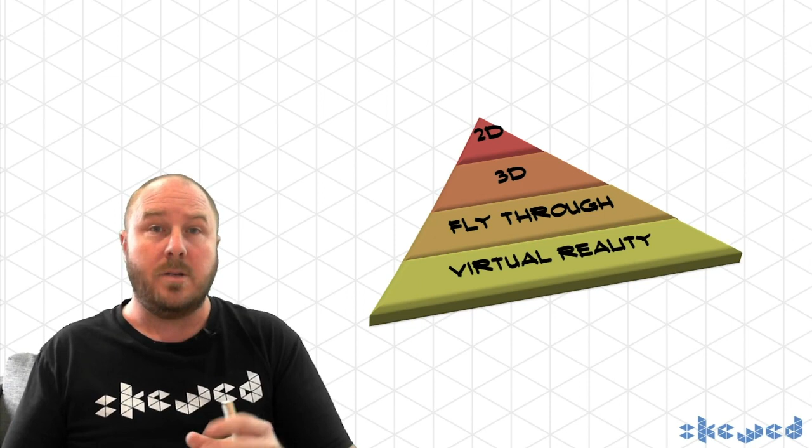Now, the future, I guess, will be augmented reality, and Enscape doesn't cover off on that. Not many apps do, and there's not really much connectivity to Archicad right now that can achieve this, but that will be the next step moving into the future in terms of people being able to understand and recognize space as they can see it relevant to existing conditions.

Now, picking your tool - there are a number of real-time rendering engines available on the market right now. And the reality is that it's kind of like picking a Phillips head screwdriver versus a blade screwdriver. They're kind of the same and not the same - they basically do the same thing, but they're just slightly different in the way they approach things. So that's one thing people need to consider when they look at this as a tool and when they compare it to others.

But from my perspective, this is kind of my assessment on it before we go into the live demonstration. First of all is licensing. Enscape in Australian dollars is around $600 to $650 per individual license per year. That's for a fixed license on a computer, but you can also get a roaming network license for around 1,000 Australian dollars. From my perspective, that's actually really cheap for what it achieves compared to the prices we pay for our other tools to deliver our projects.

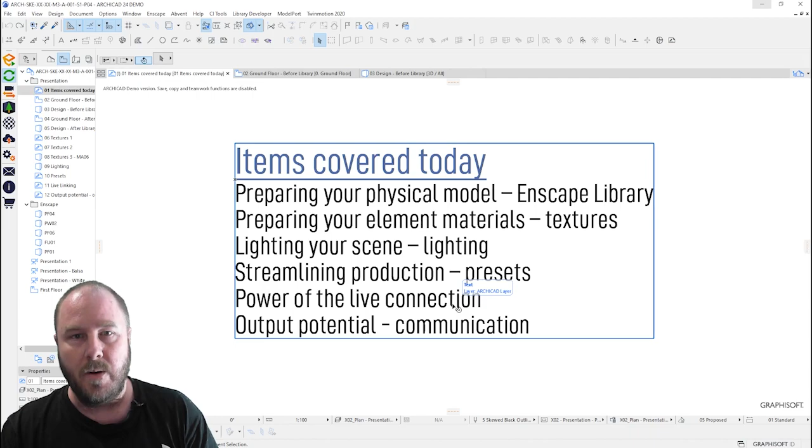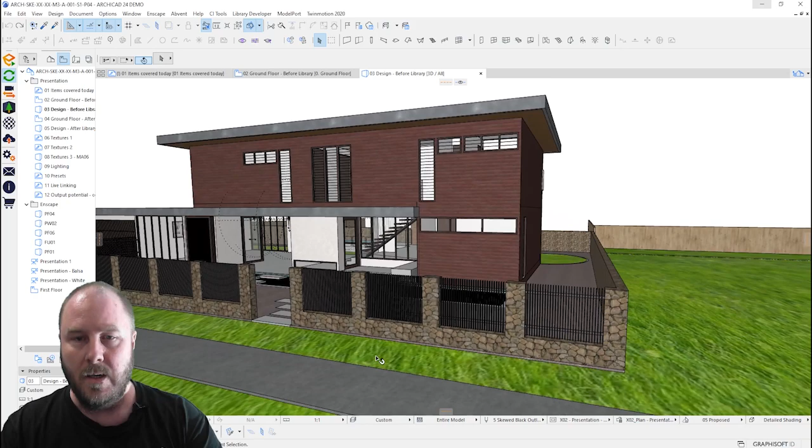First we go into our ground floor plan. You can see we've just got an architectural house, and not very much going on, just a simple house. Then we see it in its 3D state and can fly around and look - it's a reasonable architectural style house, but it's missing a lot in terms of trying to tell the picture, to sell the dream and vision to your clients. So it's really important that we start activating that by putting stuff in from the Enscape library.

The Enscape library can be accessed via the Enscape toolbar, which you can load up within your Archicad work environment. We have a series of buttons on this side. In Enscape 3.0, there are different toolbars within Archicad and within Enscape, each with their own purposes. The one we're going to use right now is the asset library, so let's open that up.

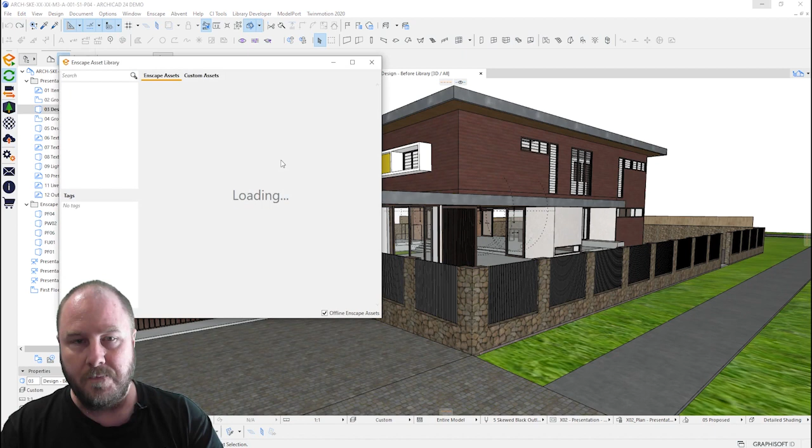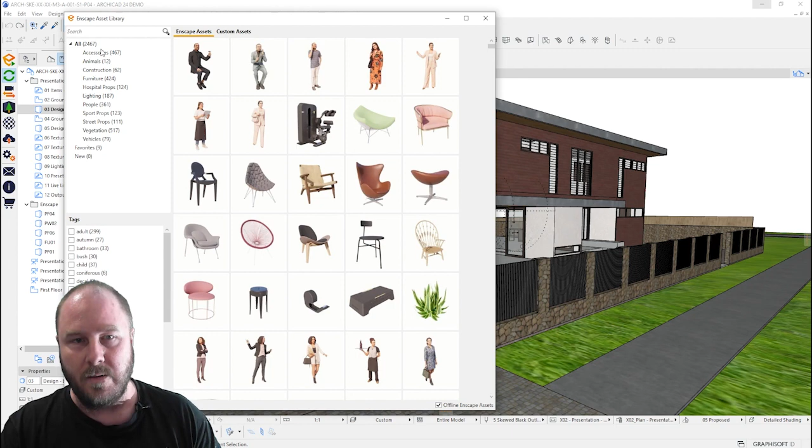The Enscape asset library is broken up into about 2,500 assets - you can see at the top there's just under 2,500. It's got subcategories, and items are tagged as well, trying to enable you to find things easily. In this instance, let's go for a person that's going to walk - you can see it's not what they're called, but they're tagged that way to find it.

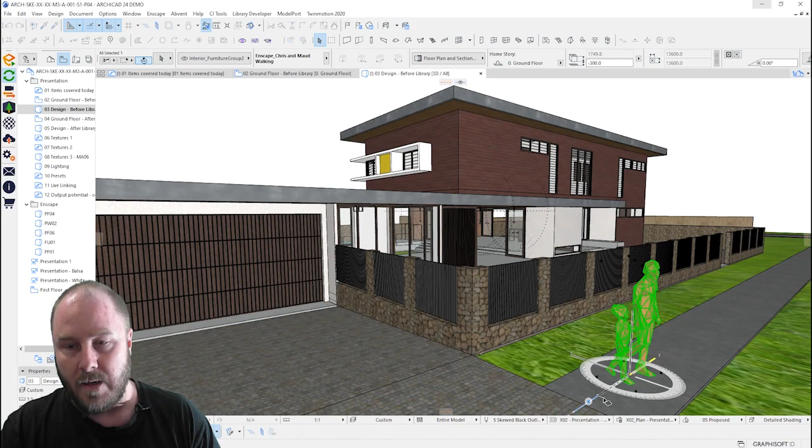Let's pick these two nice young people here, and we'll put them right here. So that is facing the wrong way - it just places it in a default position. Now we've placed those.

Because we've only got a short session, it would take quite a while to show you all the steps required to essentially dress up this model. But right now, you can see here, before the session, I went through and furnished and landscaped and provided some additional context in the street with Enscape.

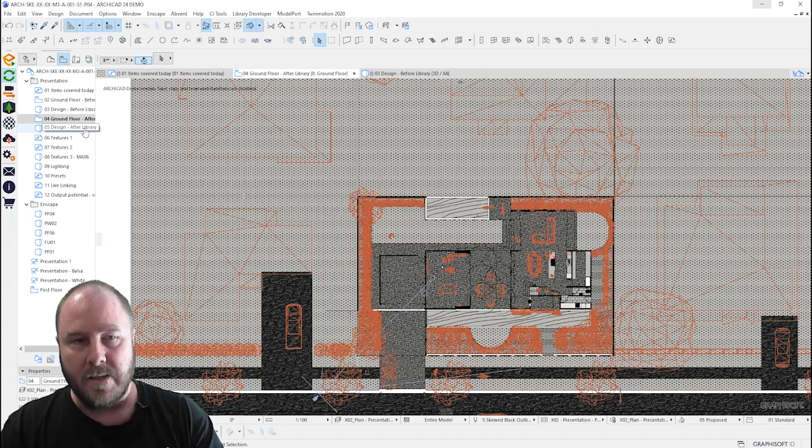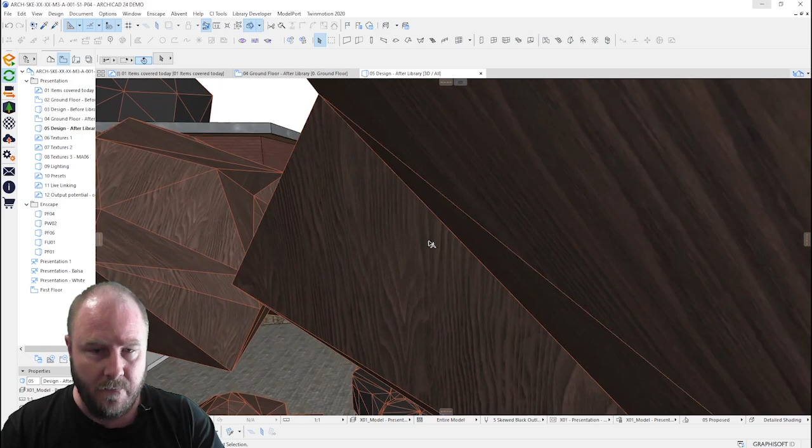So what you can see here, we have our neighbourhood all modelled in and included, with our neighbourhood trees. Enscape comes with cars, street furniture, houses even. This means you can put context in beside you in terms of all your neighbours, all of those exciting things.

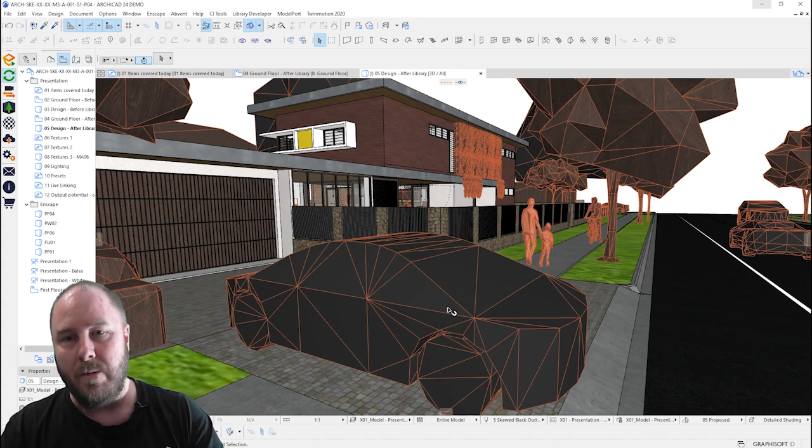Now, purposely, all of these items you can see here don't look very nice in Archicad - that's to reduce the number of polygons so it doesn't bog down your model. When you work with landscape items that are more photorealistic, you end up with a problem whereby Archicad bogs down due to the number of polygons. So essentially these are placeholders or proxies within Archicad that enable the rendering software to do its job in the back end.

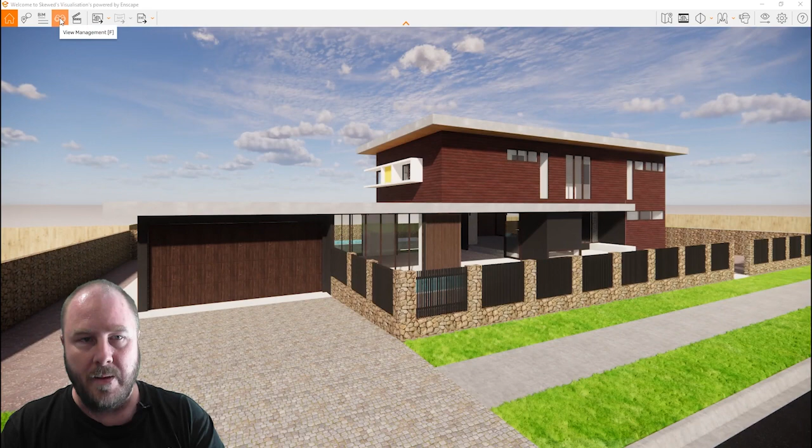So let's just jump into Enscape now and see what this actually looks like. This is the before - you can see already it looks pretty dull, not very exciting. Now what we're going to use is one of the tools within Enscape's work environment, the View Management. Let's click, and these are all the views - saved, or the Archicad saved views. Let's just click between those now.

This takes a little moment to remember exactly what's going on. It takes you to the point where you save the view within Archicad, plus all the layers you've turned on, so you can see the young man and his child walking along that we placed in before.

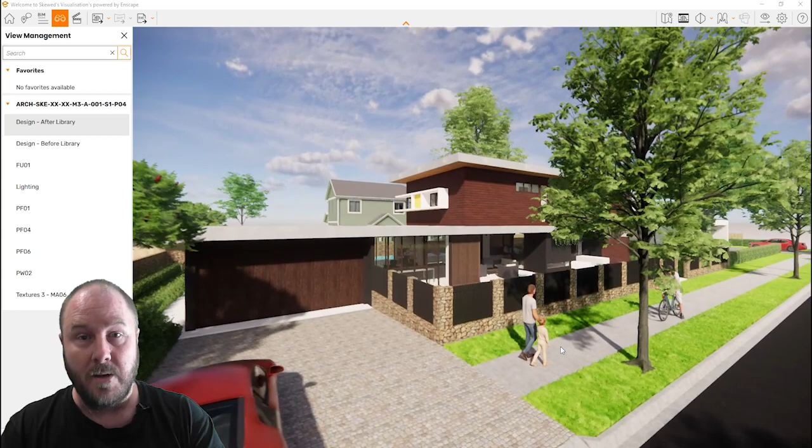We have our cyclists on the pathway - thankfully in Queensland cyclists are allowed on pathways. All the landscape elements: cars, trees, houses - we've got a whole neighbourhood surrounding us, which is really critical when trying to sell a vision to a client, giving them context of their surroundings.

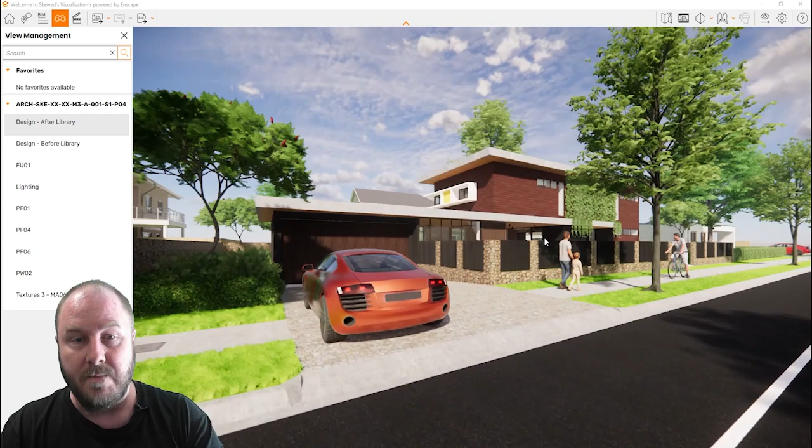Now this is obviously the case where you don't have any context that you haven't been able to model up yourself - you've just been able to put some stuff in.

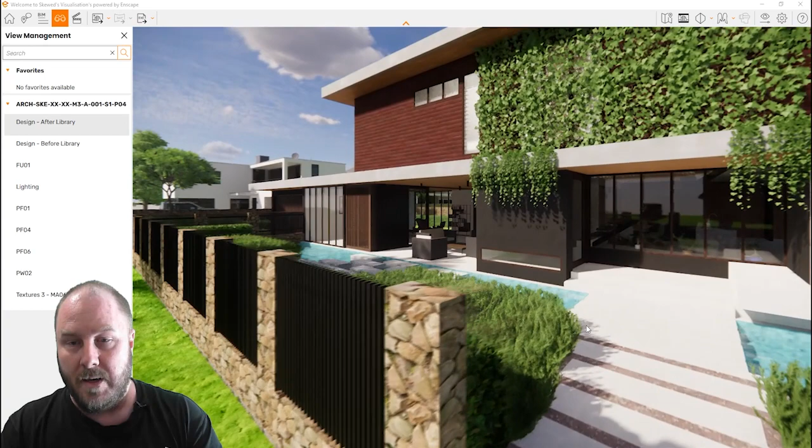Some of the exciting things here - we have 3D grass blowing in the breeze, and you'll understand how that works nicely later in the presentation when we show the outputs. We have exciting outcomes with water - it actually ripples - and going out into the pool area we have some nice landscape, with people diving in and playing sport. Lots of fun things here.

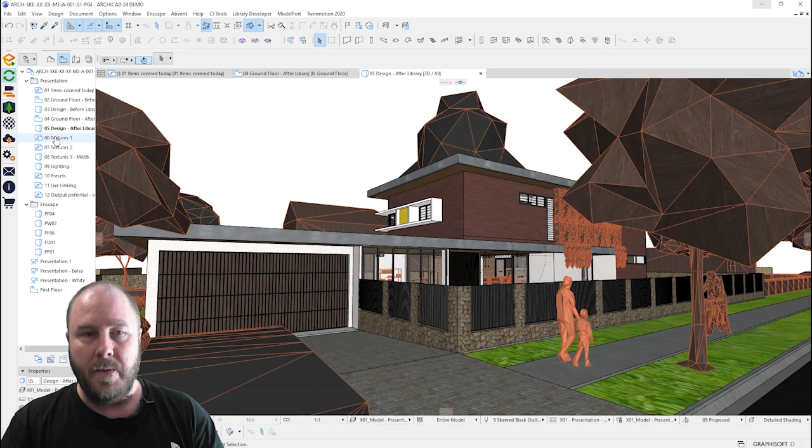Now, to take this to the next level, there's a couple more things I think are really important to talk through with you. Let's go back into Archicad and talk about textures - a really important thing in terms of moving your Archicad model forward.

This is one of many sites, and Enscape has a series of technical webinars on how to use Enscape with Archicad. I thoroughly encourage you to watch those, because Kai from Enscape goes into a lot more detail about how all of this works.

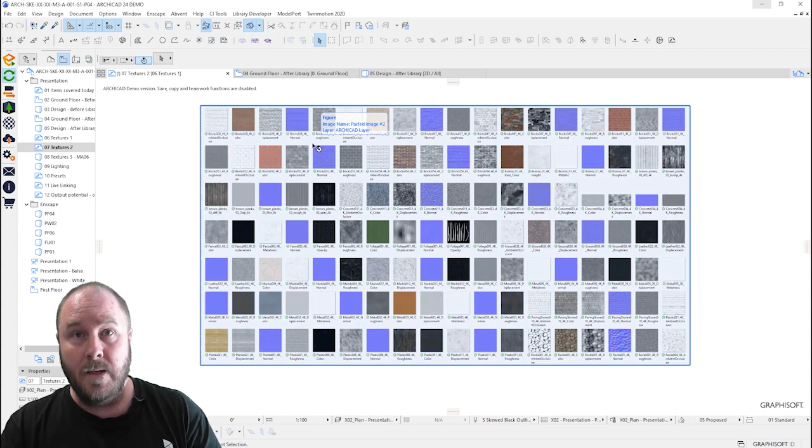We don't have enough time to go into all that detail today, but this is one of the texture websites. You can see I've downloaded these and loaded them into a library in Archicad - I have a folder saved with all these textures, which gets loaded as a library within Archicad so I can see it.

You can see here PBR materials don't just come as a single image, they come as a collection of images, and we'll see in a moment why that's really, really important.

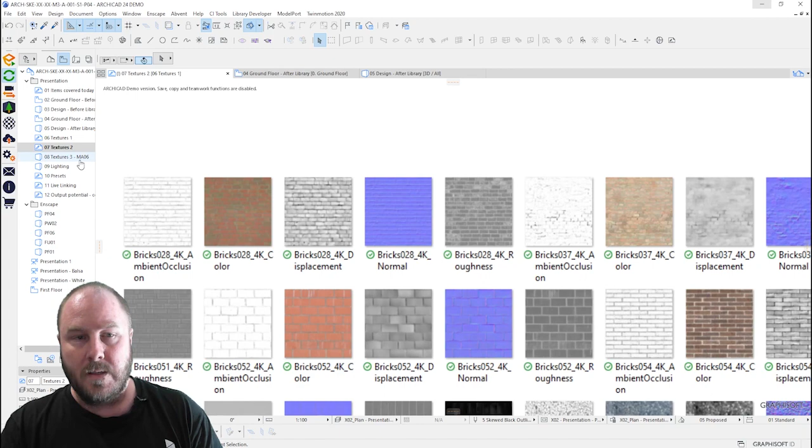One of the frustrating things when designing with out-of-the-box Archicad textures is this. So we're sitting here right now and we can see our wall - I've just applied a different texture to this wall.

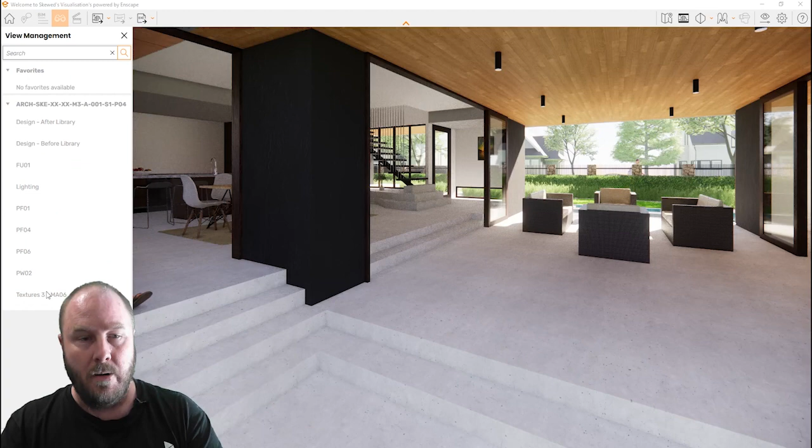Let's go over into Enscape and look at our wall - it should spin us around. Right now it's looking kind of flat, not that exciting. Enscape has the ability to use different layers or images, stacking them on top of one another to provide realism in the imagery.

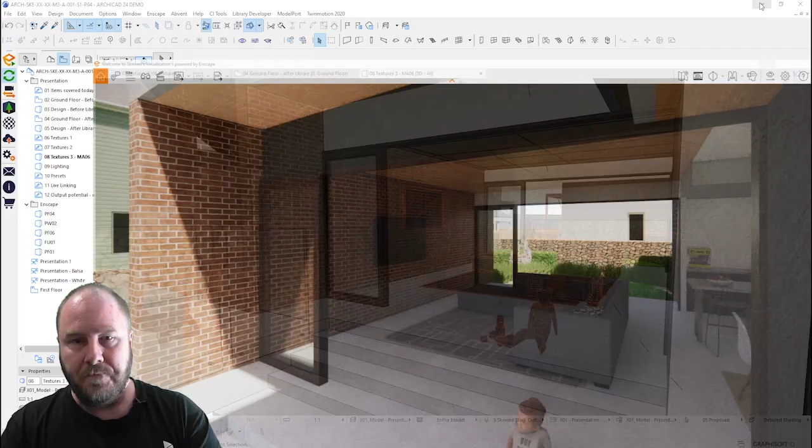So let's go back into Archicad. What we want to use here now is the Enscape Materials. Now, to speed up this process a bit - since this is a live demonstration - I have gone and created a duplicate.

So now I've updated this within Archicad - I've got a new texture, but I'd like to show you how I got this.

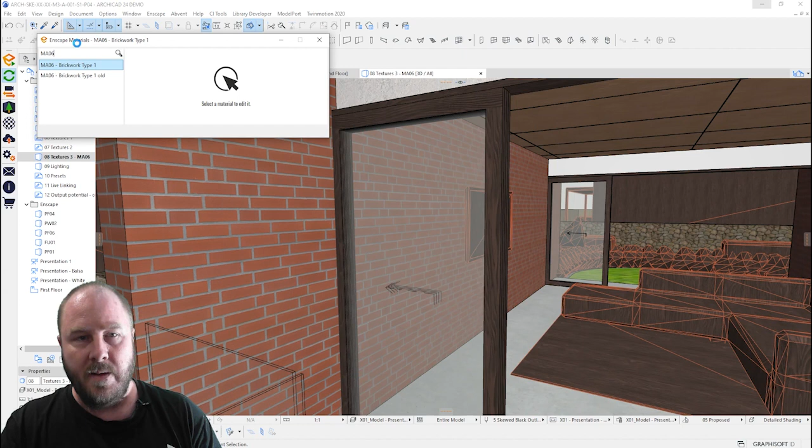Within the Enscape Materials, this has all of the surfaces within Archicad - basically a replication of all the surfaces within Archicad. Before, I talked about all the different levels of the same image that you get with a PBR image set.

So we have here our color brick, which is the brick you can see in Archicad. Then we have displacement, because you want to have displacement in the material to demonstrate how it actually moves. And then I've also got a roughness setting.

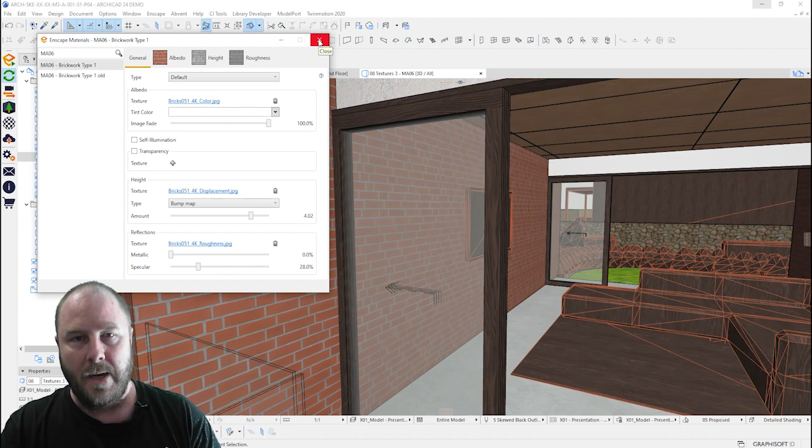So what we'd like to do here is just run a test and see how this works. Let's go back into Enscape and change our view to refresh - so we've refreshed our material here. Now I want to open up the materials palette within Enscape, and let's just do this quickly.

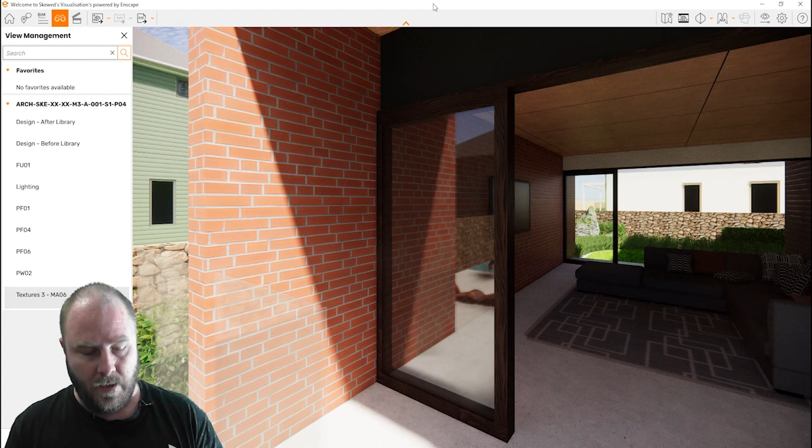And let's open up our materials, and we'll just get this over to the left. Let's bring up our materials, MA06. And let's just drop that in, zoom in a little bit on our material.

Let's just play with a few of these settings here. They take a little while to drop in, but you can see here just by changing that, it creates - obviously not what you're looking for - but just by adjusting these settings on this brickwork, you can see how you can get a little bit of texture. Obviously there's some things here that aren't right, but in terms of the way in which you use these maps...

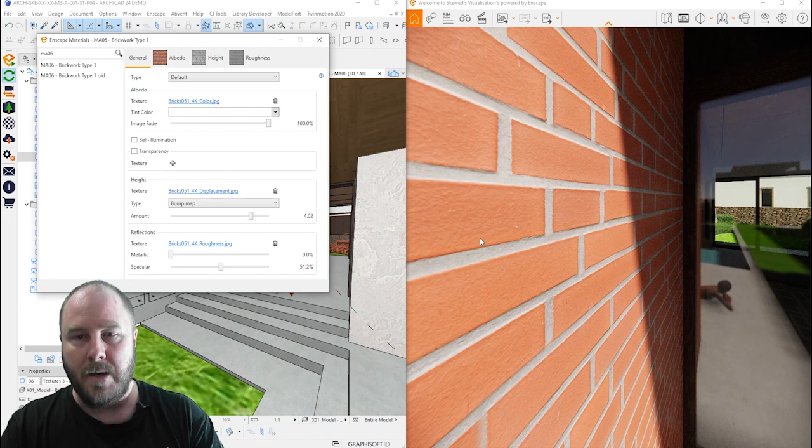And then you can get roughness as well from the material. So you can see here, as I adjust this slider, the brick starts to show a bit of texture on it as well. So all of this adds to the realism, because in real life these materials are not flat. So you can see up here this nice rough texture that we've got attached, and I can't for the life of me remember what paint finish I have applied to that.

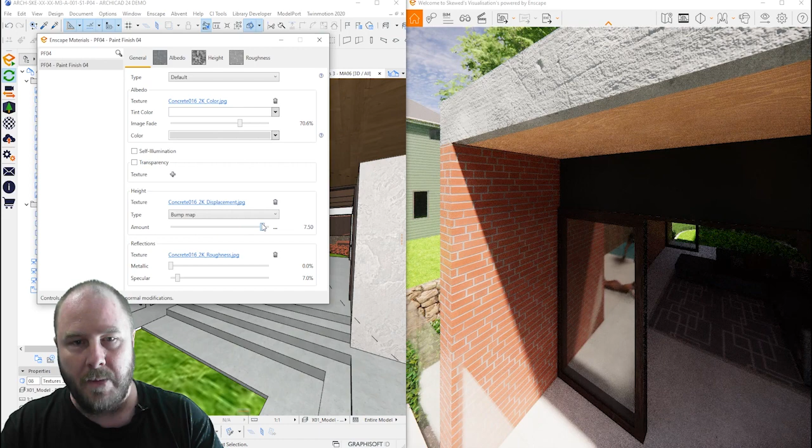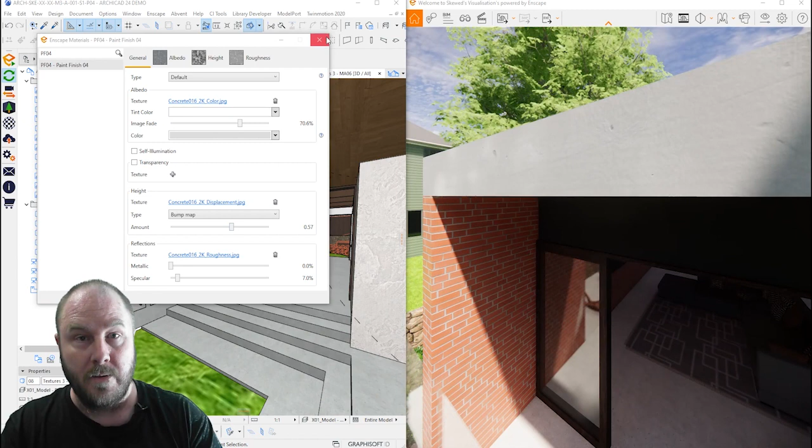So that's a really important thing in terms of the first thing we want to get right, obviously - the assets, and getting all of them in place so that you've got enough context of your model and your model's appearing correctly. Then we want to get all the textures right, so all of the materials and the textures within Archicad are set up correctly so that we get some realism.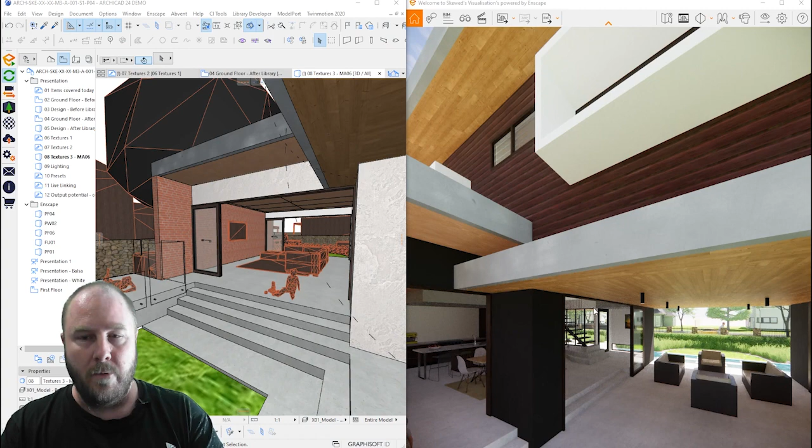And now what we want to do is move over to lighting. This is a really cool feature, and I'll show you in a second how this works in Enscape. So what we need to do to get our lighting to look right, let's go over to this side here. Within Archicad, there is the ability - and I think I have a light placed over here. Yes, I do, I have a light placed over here.

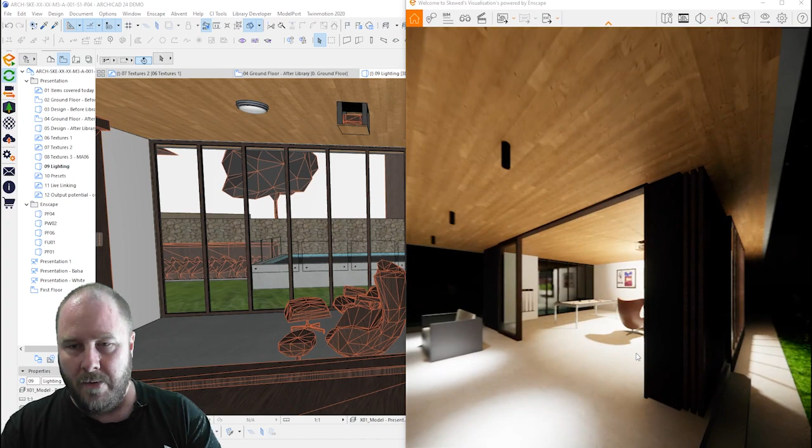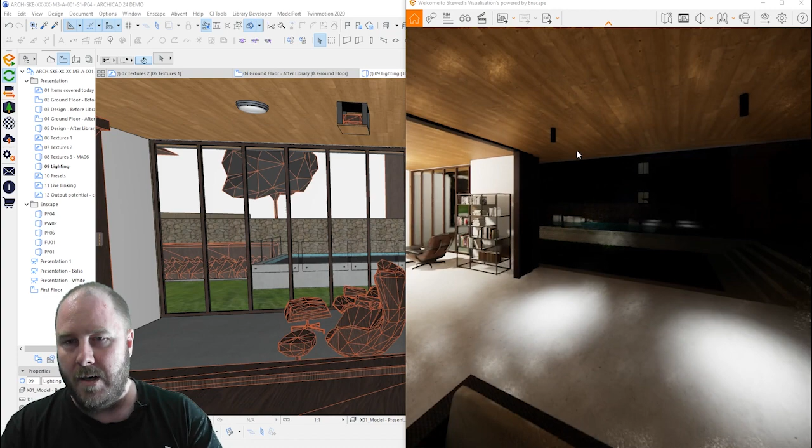So what I do is, when we go over here, this is an out-of-the-box Archicad light. Now, from my perspective, I don't really get excited by the way in which this turns out. It doesn't represent how a real light's actually going to look, so it's kind of not really a true meaning of itself. So let's go back out here - this is one of the examples I'd like to show you. You can see these 4 light fittings here, and at the moment it doesn't look very realistic, does it? Like, we can see some light coming out of them, we can see a light fitting.

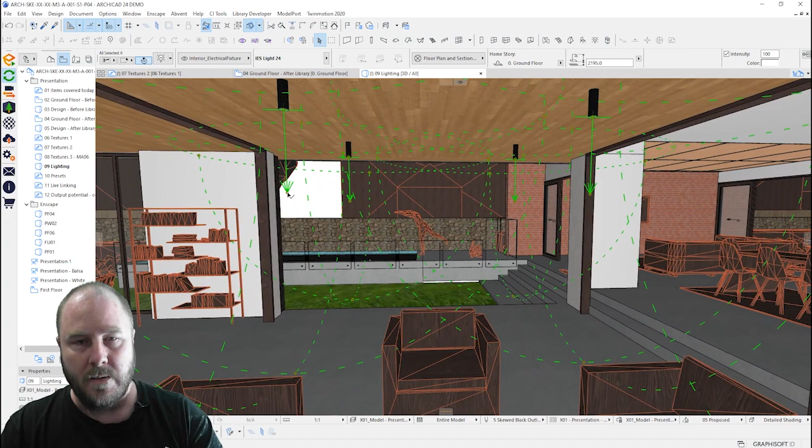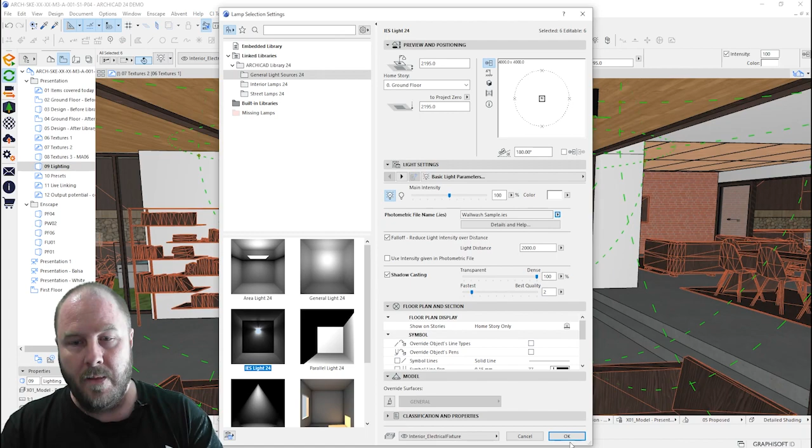So in Archicad, I think the number one way in which you can produce really good outcomes in terms of how you want your lighting to appear is we need to use IES light. So we use the IES light from Archicad under the general lighting. We get our hands on the lighting that we want - we actually get the IES settings from the manufacturer of the light you actually want. Then you pair that up with the geometry, so you model the geometry of the light fitting that you got from the manufacturer, if you can't get it from them, in either an Archicad library part or IFC or all those other formats available to you. So then the third component, which makes the lighting pop and sing - you'll see here that I've put a 5mm thick material, out of my templates, just a generic translucent white.

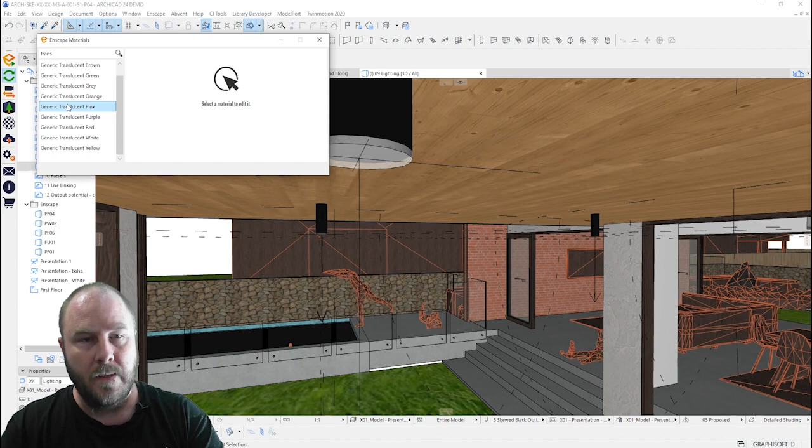So what we need to do here - and this is one of the other powerful things about Enscape - is we're going to go back into the material settings, and let's go to this material, and let's make this illuminate. This is one of the wonderful things about Enscape: we can change the color of the light as well. We could make it a blue light, but let's not do that today.

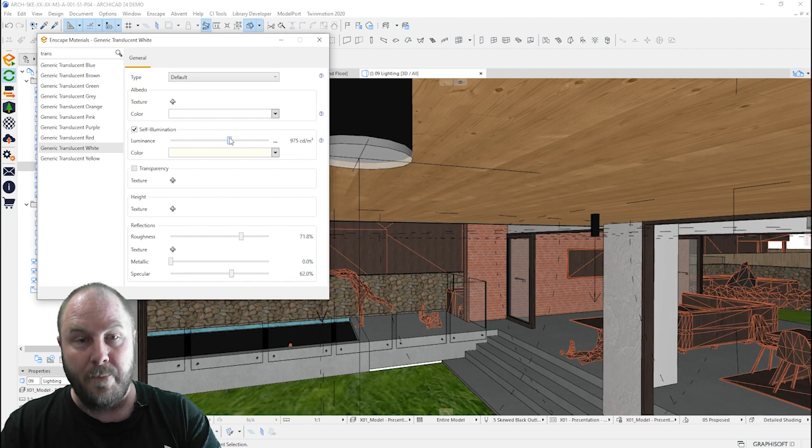Let's pick a white, but we could even go to a more advanced thing and pull it into the daylight spectrum and just off-white it slightly. We can pick the luminance, and I think 1000 is reasonable. You can drop it back if you want for a lighter approach, let's just go with that to see how we go.

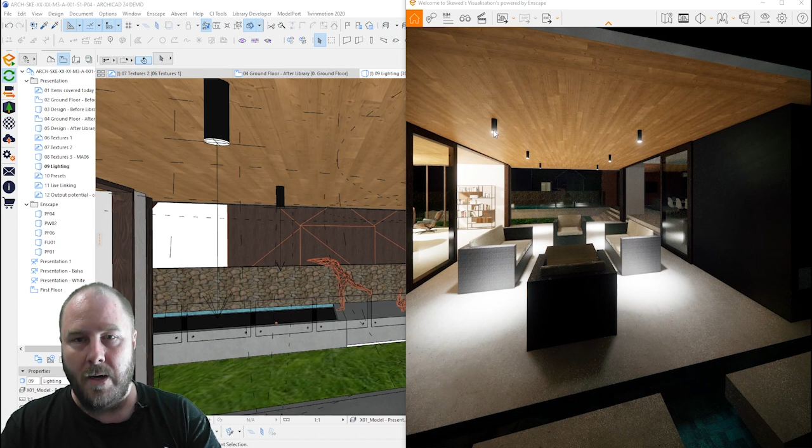So what we have is 3 components. We have the geometry of our light, we have the IES light settings from our light manufacturer, and now we have the bloom that you get from a light fitting. So let's go into Enscape, and now when we're standing here, you can see that change to the Enscape material has live updated, and that's the positive of all this. We're getting live updates from the material changes in Archicad to the material changes in Enscape.

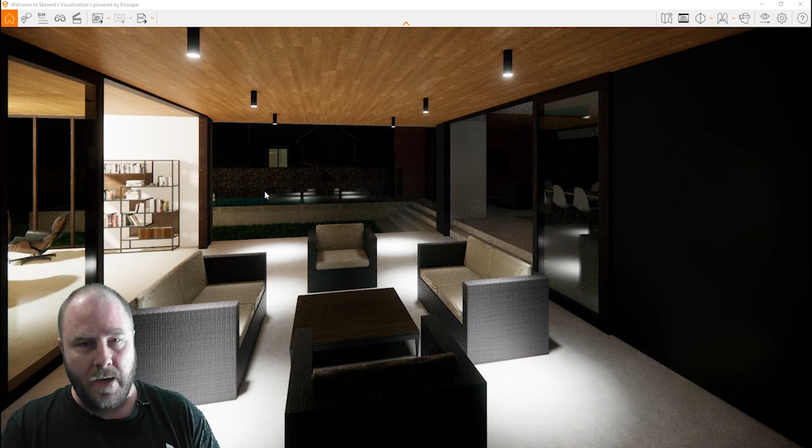So now we have this scenario where that lighting looks quite realistic. Now, when we're playing with Enscape, there's numerous things going on here. You can't see right now, but I'm holding down the shift key and right clicking on my mouse. Over on the bottom right corner, you'll see that it's midnight right now. Most people shouldn't be awake at that time of the night, but we can control the time of day. So now it's daytime.

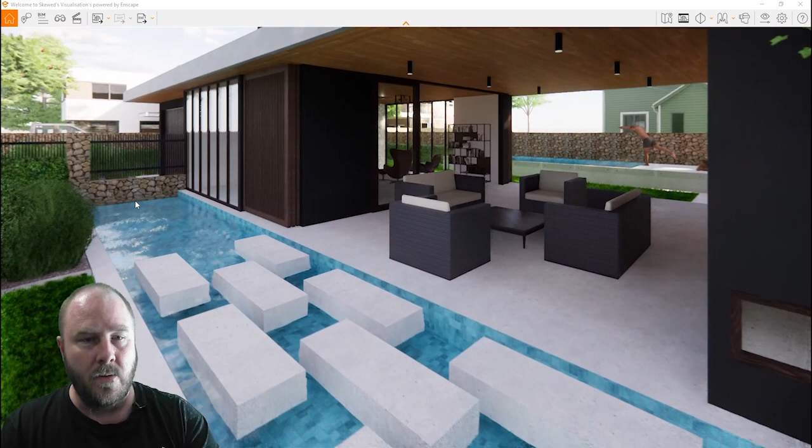We have daylight, and depending upon how you want to view, this is all connected directly to Archicad, so it is the real settings for your site. You can see here, as the day progresses, we're starting to see the sun shift over the house, and the lights turn on. The lights turn on at dusk, which is really, really nice.

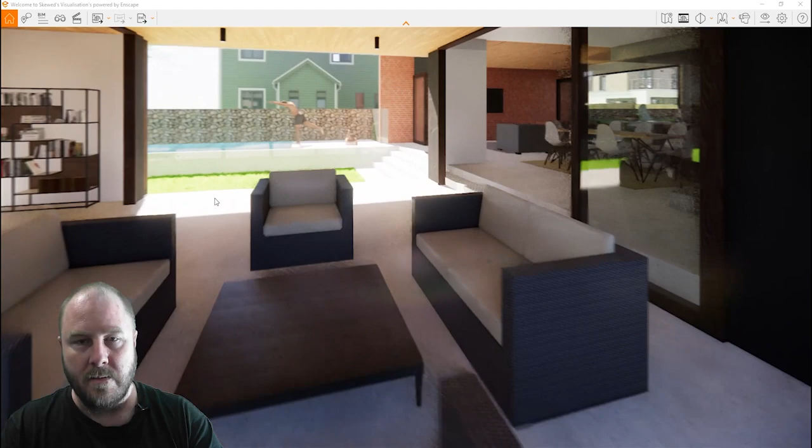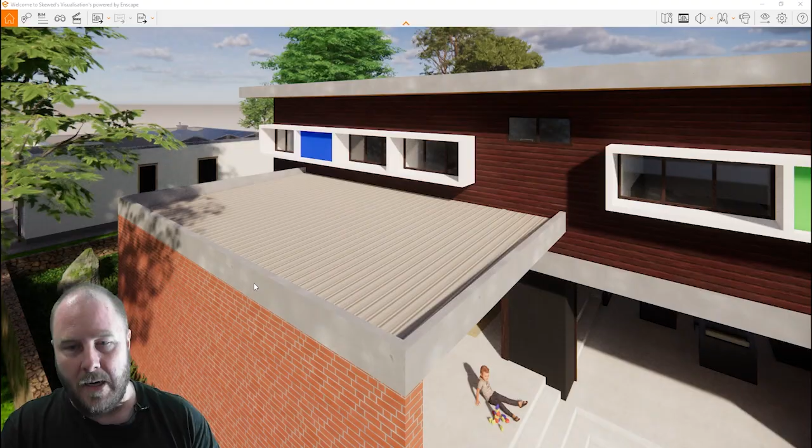But what this enables is all of the assets to shadow. So it's not just the buildings that shadow - you can see up here, we're getting shadowing from the tree, which I think, to my mind, is pretty spectacular. You're getting all of this geometry creating moving shadows over your building throughout the day. That's kind of one of the settings you can play with, or not play with, really. You're actually getting to see exactly how your house or building performs in the designated environment that you actually have.

Now, moving through to the next thing, there's a whole series of other settings in here. Collaborative annotation, so you can annotate in here, and this is what's linked to BIM track. We also have BIM mode, which is where all the information out of Archicad gets populated when you click on the information. Video editor, which we won't go into too much detail now, and we'll talk about the exports in a moment, but I want to touch on some of the presets.

So in terms of view management, you can walk around in three ways. My preferred method's 2-point perspective, because that's kind of how I view the world. This is for fly and walk mode, which is directly connected to VR. Once again, VR is really hard for us to present to you remotely right now - we can't really show how well VR actually works for you as a person watching from remote. But all I have to say is trust me when I say my clients have been wrapped when they've done that.

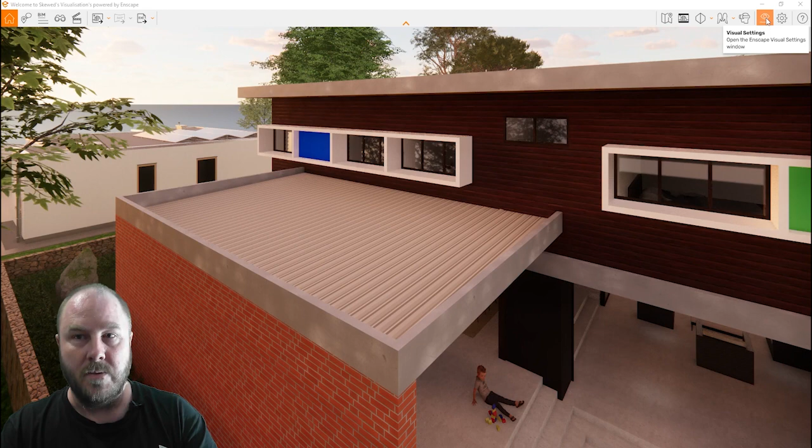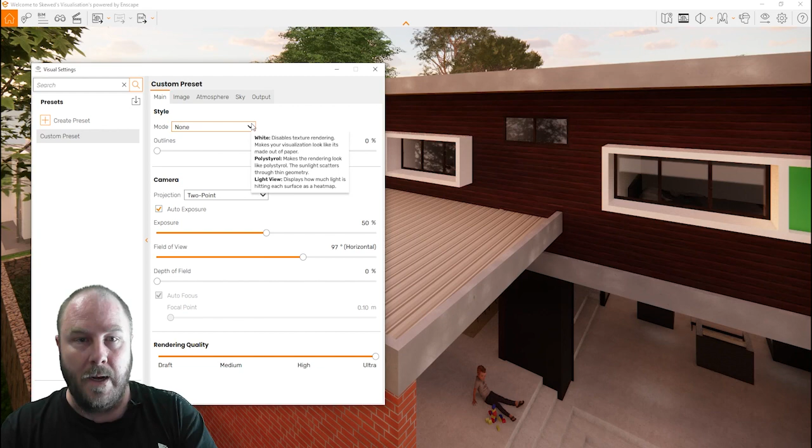This is where I think it's really important in terms of visual settings. So we go into our visual settings here, and what I have minimized over here is the presets button. This is actually one of the new features in Enscape 3.0, which I like. Haven't gotten a lot into it yet, but one of the things I think is really important is that when you're presenting an early design to your client, you want them not focusing on the colors of the materials - you want them focusing on the spaces and how they relate to one another. Enscape enables you to make the materials disappear. So right now, we can walk around this model and make the client focus purely on what the spaces are and how they relate to one another. I think that in itself is a spectacular setting.

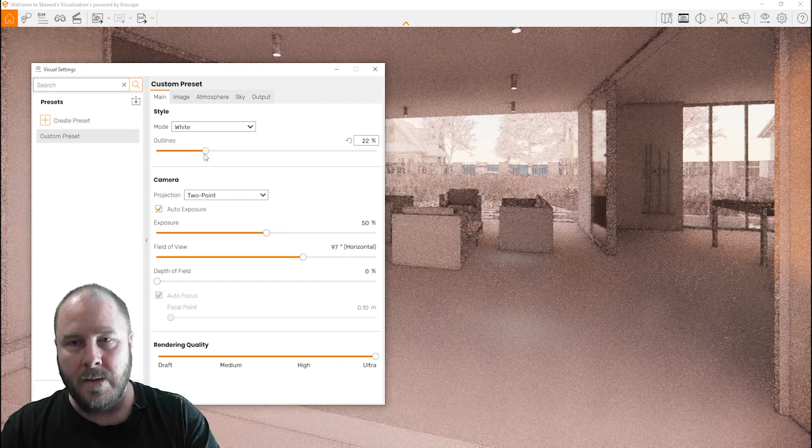Now, what we want to be able to do is set up our outlines. The outline mode gives a little line on the outside of all the angles. So you can see here it's turned into a very sketchy output, as if you've done it with a big thick pen.

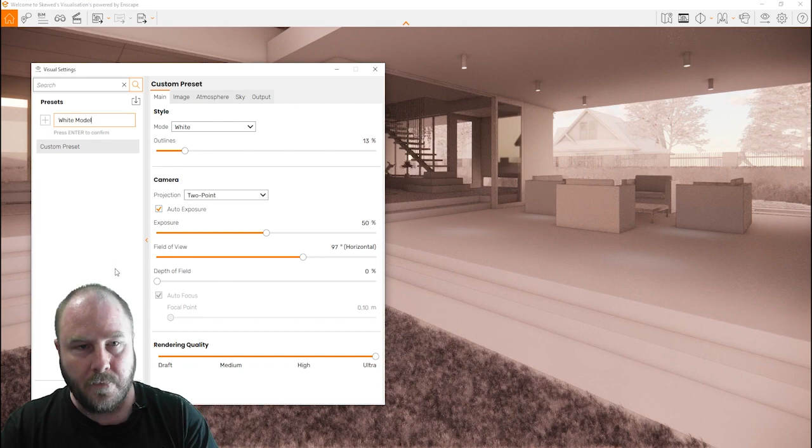Applying a slight outline to elements in black and white mode can give a really powerful outcome. Now what I want to do is create a preset, and let's call this White Model. I've only just touched on one of these items here, but we can go into all of the contrasts and effects we can attach to these things.

One of the things some photographers like doing is vignette mode. You can see how it's tightened in and created the darker outcome around the outside.

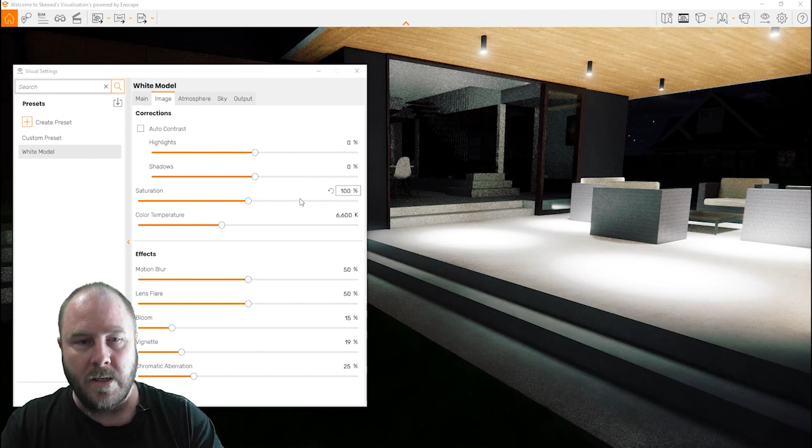We talked about bloom before, so let's go back in quickly and change the time of day to night. Now look at these lights sitting there. See how as I adjust the bloom, it washes out the light, the illumination is washing out. Now it's disappeared, so it's turned it off.

Lens flare is how the lens reacts to direct light hitting it. Motion blur is more related to moving. And we've talked about vignette already.

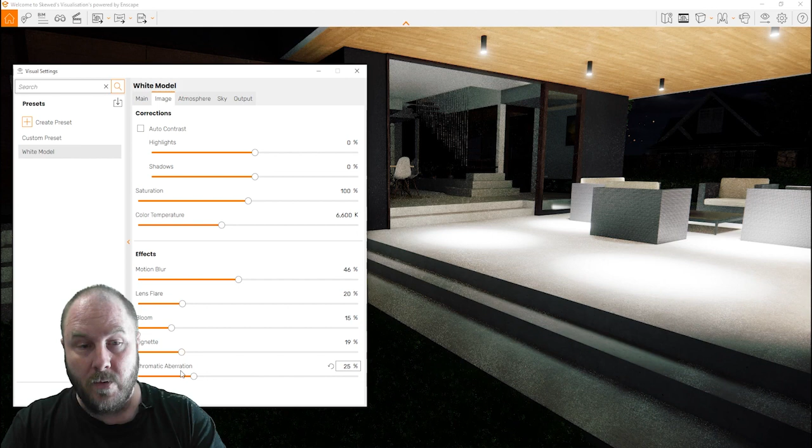One of the other things that's really good in Enscape is that if you don't know what something does, you can hover over one of the settings and actually see what it does. You can also come in and change the atmosphere and fog.

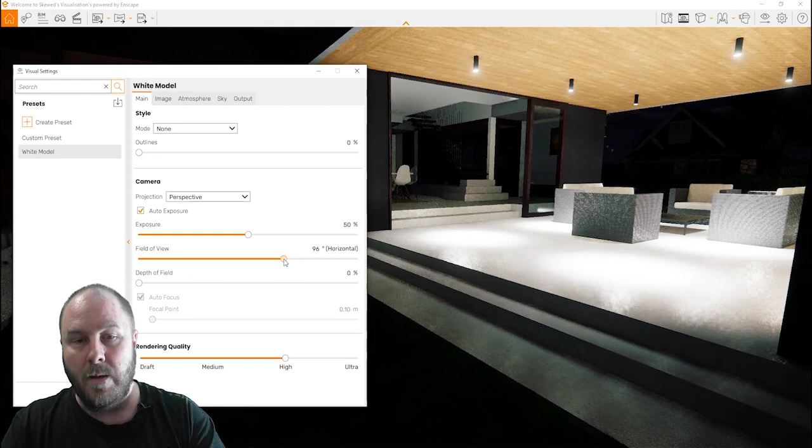One of the other things photography lovers can do is change the depth of field and field of view. I always walk around in my fisheye lens mode at 97 degrees. I have another architect I work with a lot who just wants to work in 50 degrees. He hates me every time I open it up into that wide angle.

Sky lets you set all your skies and also your outputs. Sometimes you might have different outputs, and these outputs you can set up for your movies and the like.

Other things I didn't touch on just then are Polystyrol models, which it should open up. Yep, and it's a bit hard at nighttime to actually see how this functions and works.

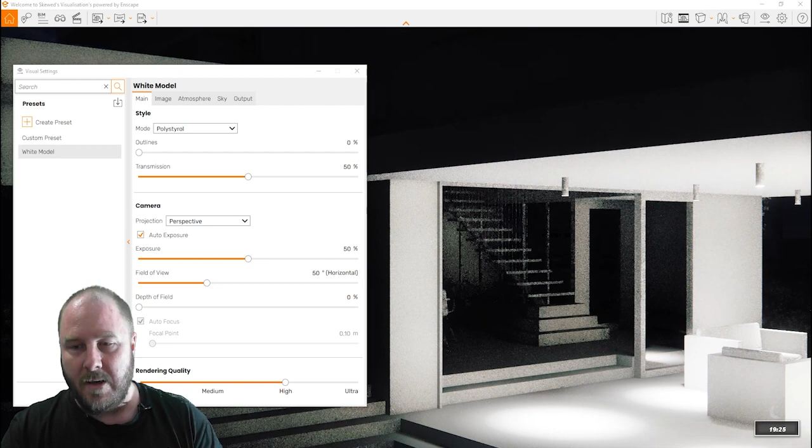But it's a similar outcome to the white model.

And then light view, so you can see how much light exposure each of the surfaces is getting at particular times. It's not something I use very often, but it's pretty powerful in seeing where light and shade and the differentials of light actually work.

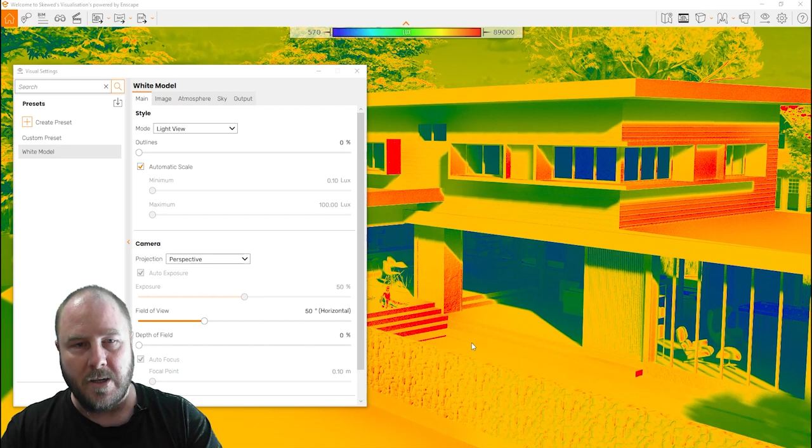So those are some really cool things with all the presets. Let's go back to none, and we'll stick with our two-point perspective, and go back out to 97, which is my favorite. Oh, that's exposure, don't mind me.

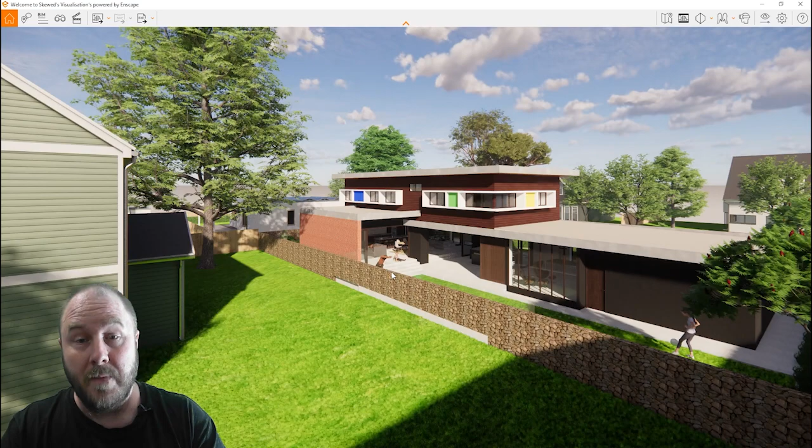Field of view is down here, if only I ever get that right. But you can see here now how crisp and clear that is.

Now it's all good and well floating around in the model here within Enscape or within Archicad. What we really want to be able to do is get exports out of this. There are a number of different exports we can achieve out of Enscape.

First of all is views, so we can click on this and get a view, and you'll see some of the views I've created from this model in my conclusion. We can also do batch rendering, so you can batch render all the different images set up from your views.

We can set up a 360 mono panorama or stereo panorama. Now, why that's grayed out right now is because we're set to two-point perspective. Once we're set to normal perspective, you can pick up either of those, and there'll be a preset at the end of this presentation that I'll put out for you so you can have a look at one of those.

And then there's also executables, web standalone and executable standalone. This is an environment where you can send the model to a client or stakeholder who doesn't have Enscape, Archicad, or even the internet turned on, and they can walk around the environment either in normal walking mode or in VR, which unfortunately does need to be connected to the internet because of Oculus. The web standalone gives you the ability to host this on Enscape's website or behind a portal on Enscape's cloud, which you can then access.

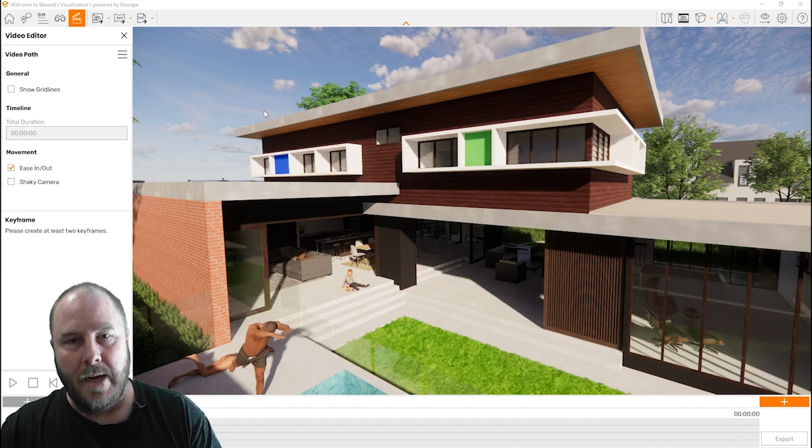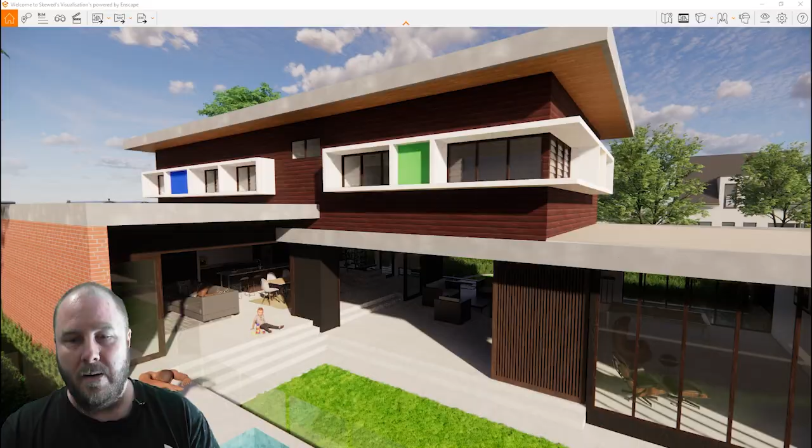So for people that are used to Archicad, let's just hit this button to my desktop really quick, and this is 100% live, no speeding up whatsoever. So for those people that are used to CineRender within Archicad, you know how long that takes to push out renders and set materials and get them looking right. In here right now, you just saw it took literally under 5 seconds to export that out. So there's so many benefits in all of that.

So I think I've covered off on all of that, and we'll go back to the conclusion. So here you can see the final render from a video that you can save off as an MP4 at a high resolution. So all I've done here is just done a very quick render output. The file that we're using is by no means perfect in the sense of the textures and that apply to all of the finishes and the surfaces.

The content that's in there isn't perfect either. But what you can see from something that we've pushed together and rushed, the actual quality of the output's actually quite good considering the lack of effort that's actually gone into the model to actually generate it and create it. So that's kind of one of the things.

Now, today we didn't have time to talk about this, and it's one of those things that bugs me in some ways, but is actually probably the best component about Enscape as it stands. We can be in Enscape and Archicad sitting on a laptop in our client's house or at our client's office. And by having Archicad open and Enscape open, within one click, we can be into an Oculus Rift, and your client is then walking virtually around their building.

Now, when I was putting this presentation together, I was contemplating putting a couple of photos of my clients actually in to this presentation, but I thought, no, I won't do that because it's going to a global audience. We don't want to have them seeing that, in terms of their privacy. But I can tell you right now that the investment in an Oculus Rift headset, a laptop, and an Enscape license has more than paid for itself with the number of presentations which I've had with clients.